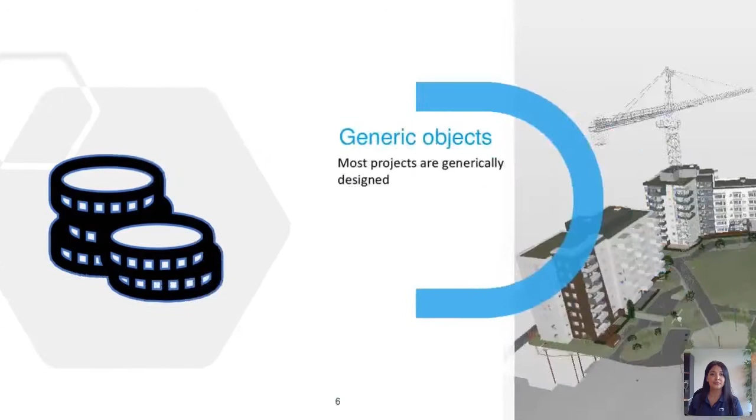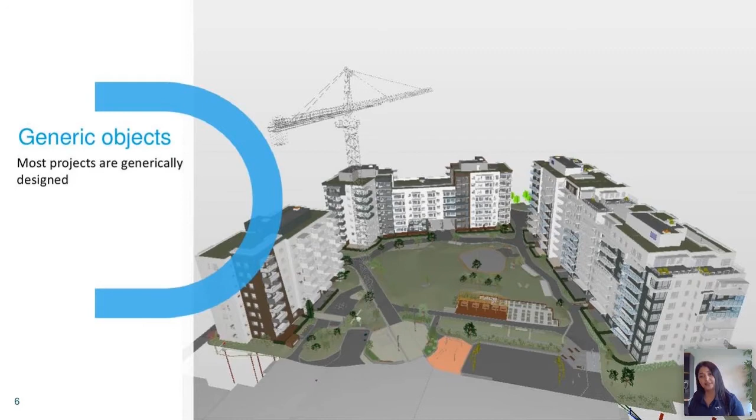First of all, I would like to start by saying most of the projects that are being used in BIM today, or being modeled today, are being modeled with generic objects. That means they are generic and not specified. They do not tell you any data, unfortunately. This results in projects that are missing information or have fragmented information, information that may be entered into the project manager via an email, a USB stick, or PDFs.

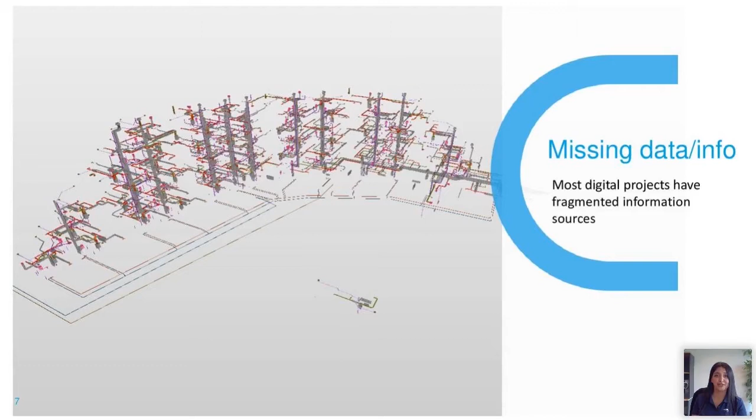Now, where is the mechanical data then? It's definitely not in the model, not yet. Unfortunately, 30% of materials that should be used in different projects, such as civil and infrastructure, are not being used, and unfortunately they end up being wasted. Now, why is it so? Today we will go through those three journeys and try to make them clearer.

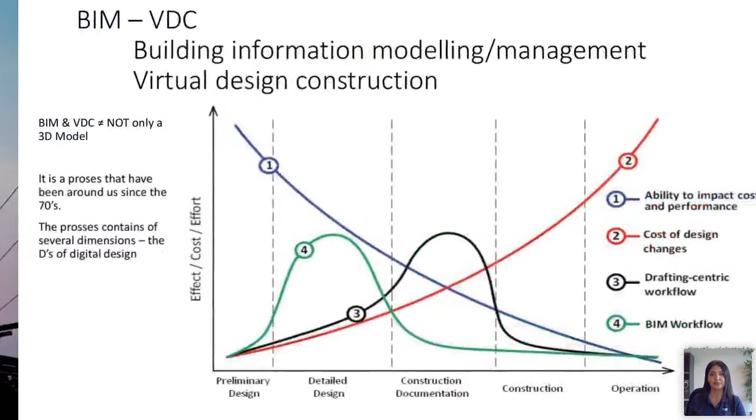On how to benefit by using manufacturer information or plugins. But before we go there, we need to start with why BIM and what is BIM? Is it only building information modeling, or is it a little bit more? Is it, for example, maybe management as well?

Can you use tools to be able to manage the whole procedure from A to Z during the whole project? Is BIM only for civils and only for buildings and houses, or could it be something that could be used in infrastructure?

In front of you, you will see four different graphs numbered 1, 2, 3, and 4, where 1 is the ability to have an impact and how this impact can change the performance of the project, where 2 represents the cost of the design and the cost of changes in the project, where 3 is the drafting workflow, the real 2D design we're used to, and how to have those on paper or in a model, when it comes to the workflow.

And number 4 represents the BIM workflow, basically the management workflow. So if we look at the preliminary design, in the beginning phase of a project, whether it's civil, manufacture, or infrastructure, it doesn't really matter. Both need a preliminary design, a pre-project, as we call it.

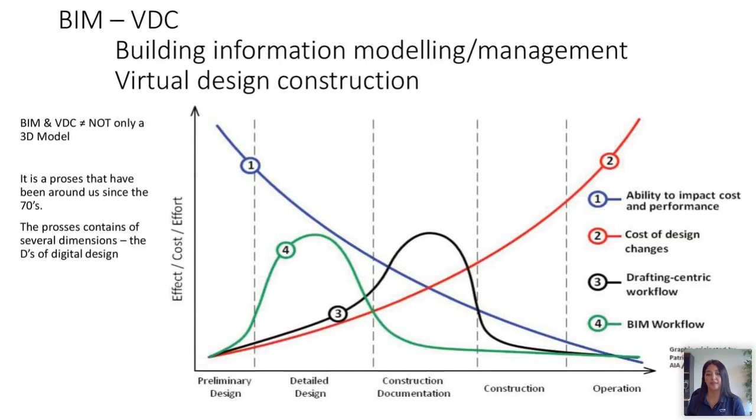So we also talk about different Ds in BIM and the different dimensions of BIM. Sometimes people say, oh no, BIM is something new. But BIM has been existing since the 60s and the 70s, like you saw in the previous slide. Meaning, what kind of information is already available.

So you have the contracts, you have some kind of sketch, or you have some kind of model that already exists. Well, that's BIM 1D and 2D. 2D, when is the 2D workflow that you guys have worked with previously.

3D is when you add a height, so it's no longer just an X and a Y axis. Now you have the Z axis.

That's the 3D model. Now, if you add another parameter called time, you'll get 4D. Now you can control the planning, you can control the resources, you can control when this product, those walls, those windows, those pipes, can come into the project or onto the site. So then you can control the ordering in 4D.

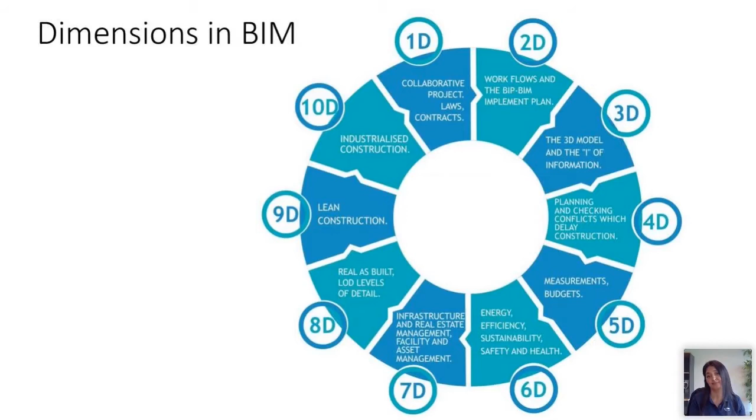A little bit about the programs that we are using today. So we're using different programs, and most likely, if you are a designer, you'll be working on either AutoCAD, Trimble, or different programs.

It's very important to remember that those programs are something called extrude programs. Basically, a line can be made into a pipe, or a line can be made into a wall. So it doesn't have that much information in the beginning, meaning the program itself might look like it has some architecture features, some structural features, but in reality this information is something you need to insert into the object yourself, or you use objects provided by the manufacturer.

Now, if you are working on Autodesk, either AutoCAD or Civil 3D, you'll generate either a DWG or a DXF. If you're working on Revit, you'll generate an RVT file. And the way all of those different programs are linked to each other is by having an IFC, the International Open BIM format, that can actually show you a presentation of the model and what data is in there. Does the building, do the walls collide with the windows or not, etc. All of that information could be controlled in an IFC model. But the value of the IFC increases with the data. Otherwise, it's just geometry, lacking data.

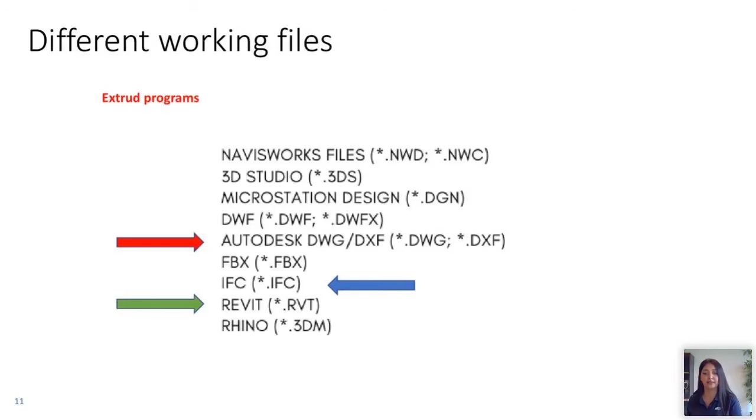This takes us further to something called level of development, or level of information, or model maturity index. I think the most confusing thing in BIM in general is that you have 3 different names that represent one thing only, which in this case is just the information — how much information do you have inside your objects. And it's not like all architects need to start from a detailed design drawing, which most naturally wouldn't happen.

Meaning you cannot be engineering and designing the real project in detail and still stay in LOD 100. It doesn't work like that, because LOD 100 will not give you the right information. Then you need to move from LOD 100 over to at least LOD 350.

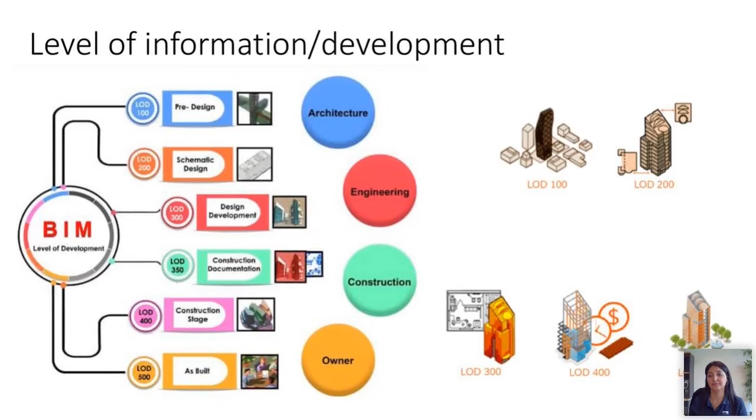So like we talked about earlier, BIM has been around for generations. It's nothing new. But in the 20th century, you had probably used most likely a LOD 100, where you even had to move from pressing a mouse to pressing a keyboard in order to put in and plug in some information.

But we're not there today. Today you could have a Zaha Hadid design that has so much information and knowledge without it being too heavy or without it being wrong.

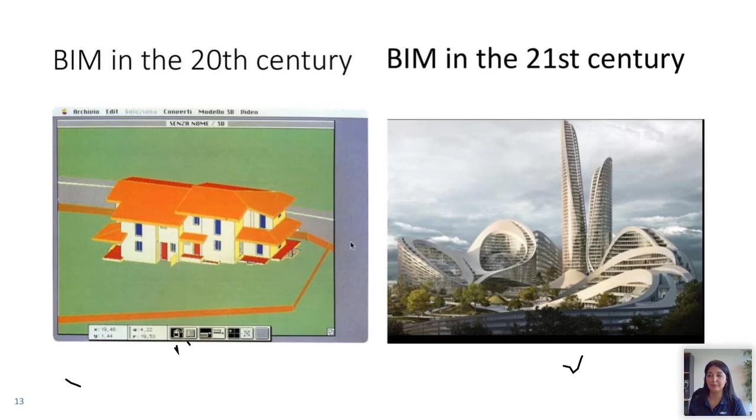Basically, from the building alliances in Norway, a third party, government regulations say the higher up you move in that triangle, the better it is for the economy of the project and future projects.

So if you could actually reduce your material usage, that's the whole point. Because then you're really only using what you need - you follow some kind of description, this is what I need to be able to do this project, I don't need anything more. Then all the returns, all the waste, everything will be minimized.

And how do we get here? Because this must be the ideal place to be for everyone. If you're a building owner, an engineer, or an architect, this area should be where we all want to be.

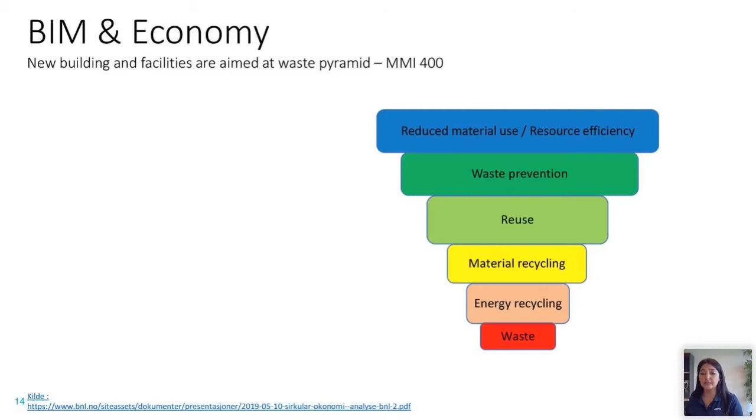And all of us in the different positions in this sector have a different responsibility to be able to get there. I'm not going to go through all those points, but I've tried to describe it in a way where the different responsibilities and who they lie with are shown by colors.

This makes sense because it's the owners who are going to be sitting with the model or with the building for at least 70, 90, 100 years into the future.

But who is supplying this information or this product are the contractors or the manufacturers, which is a list that comes towards the end. So I've tried to show you guys a little bit about how

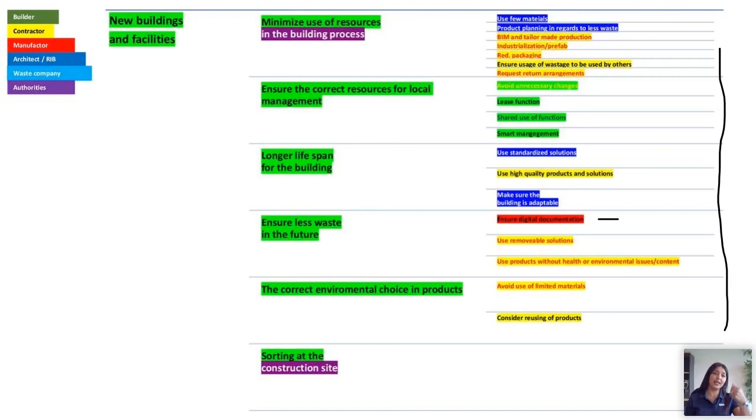You could read it in a mechanical way. You don't need another human being to go in, open up a PDF, look at it, read from it, and then extract the information. That's a waste of time.

What we need is enough data for you, so you could order based on that, for example. But then we need to know what kind of data you need.

I hope this was a little bit explaining of how we could help you with, for example, removable solutions, using products without any problems with health, and also not least the environment conditions - that it's not too much noise, or the water runs in the pipe correctly, etc.

All of this is something that we could help the contractor with. But again, you need to talk to us about it.

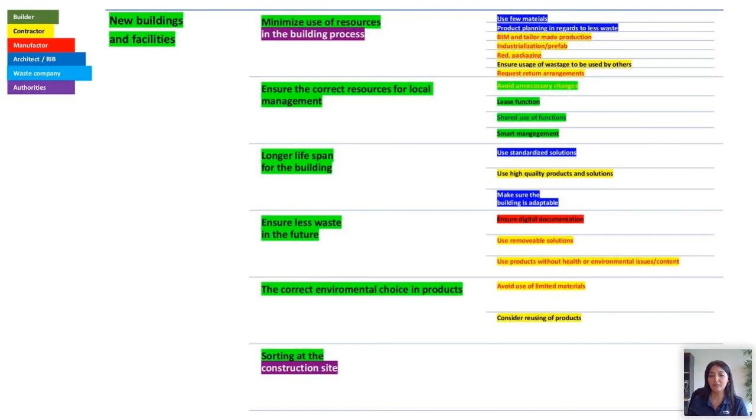So a little bit about Wavin, and in the next chapter, how our design could be done easily.

So what we have available today across the 4 countries: we have SiTech Plus available, we have AS Plus available, we have Wafix, which is very familiar in Norway. We have Pexrør or Tigris in Denmark, which is also well known. We have the Q-Bic Plus or infiltration cassettes, and we have the new PPR, or Ekoplastik as we call it, also available on MagiCAD in Finland.

We also have the tanks, the oil separator tanks as well.

I know that some of you guys have probably already gone in on MagiCAD and downloaded some of our availabilities there.

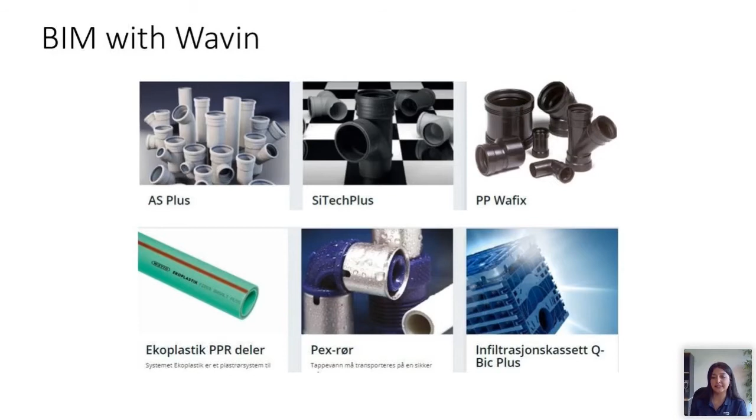So this is how they would look like in the project that you guys would download. It will be represented with an OD and a DN, depending on how you guys are designing, either based on inner diameter or outer diameter - so you have Wafix PP, AS, and SiTech.

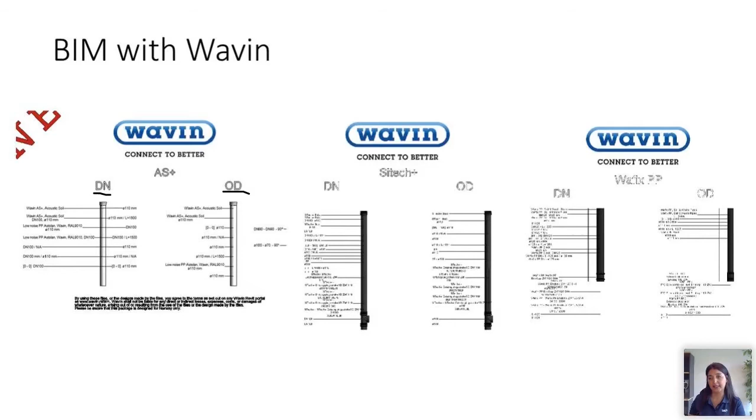And there you go with the Ekoplastik PPR and the HEP2O. So what's going to happen is we will probably be having a future webinar on what you guys would like to know about, or have a real step-by-step walkthrough on how to use our packages in a real project.

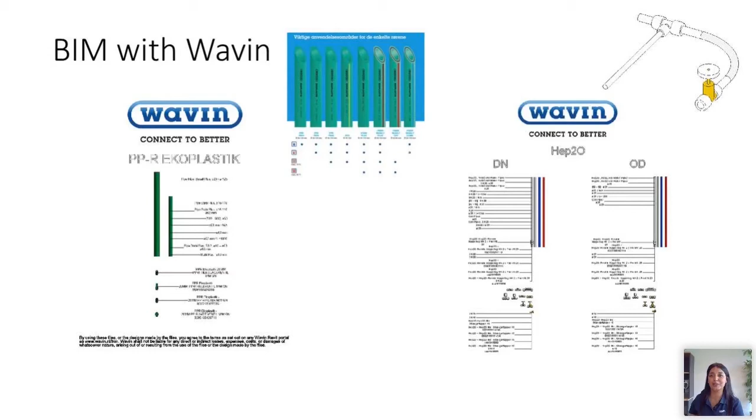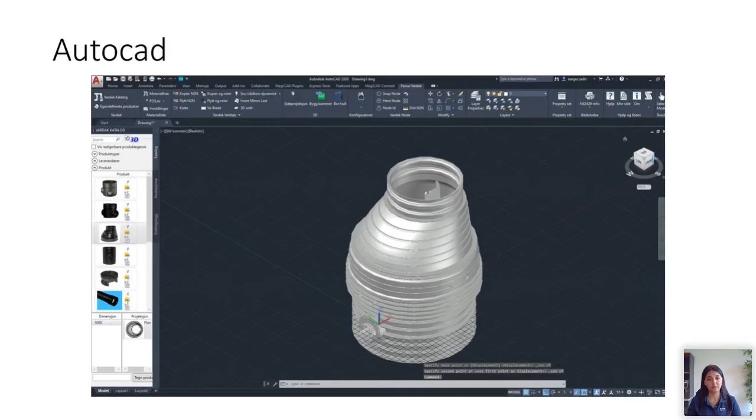And in Novapoint, if you guys use that kind of library, no problem as well - you could find our products there too, and you can use them when it comes to Civil 3D.

You can use them by laying, and you can also use Dynamo in Civil 3D, where you can place things - for example, if you have 10 kilometers and you know that every 50 or 70 meters, depending on the country's regulation, you need a manhole. By using Dynamo, which is now part of Civil 3D as of this year, you can place a manhole every 70 meters, for example, and it will happen automatically like this.

So you don't need to actually go in and manually put this in every time. If it's of any interest, we could absolutely have a webinar about this and talk a little bit about the possibilities we could have together by using a library combined with Dynamo.

So all of our data is scripted, and all of our information is scripted in the packages. The data that you need will be either inside the package or linked on top of it.

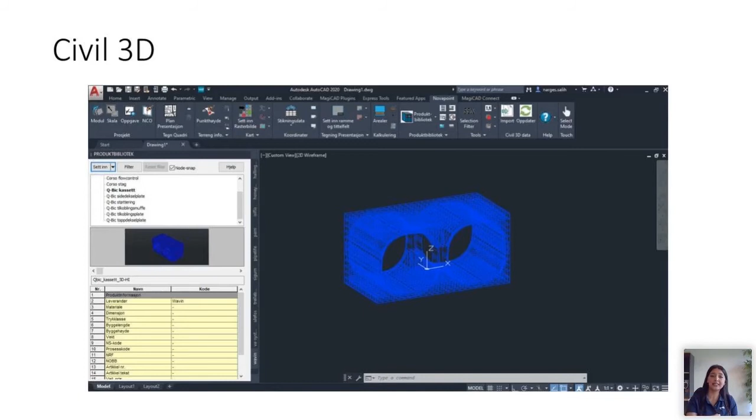So I'm going to show you guys a little bit of a video.

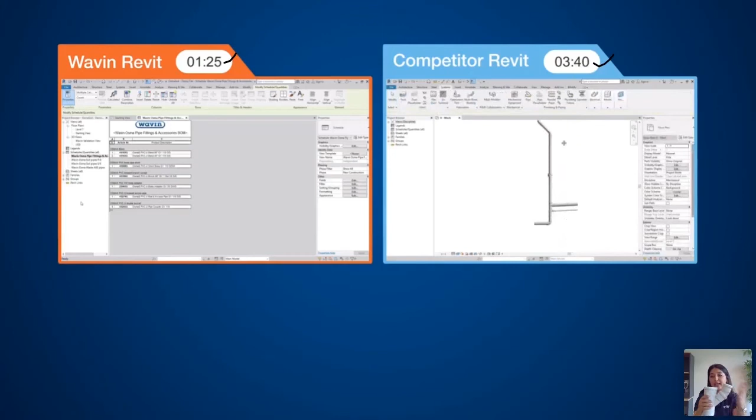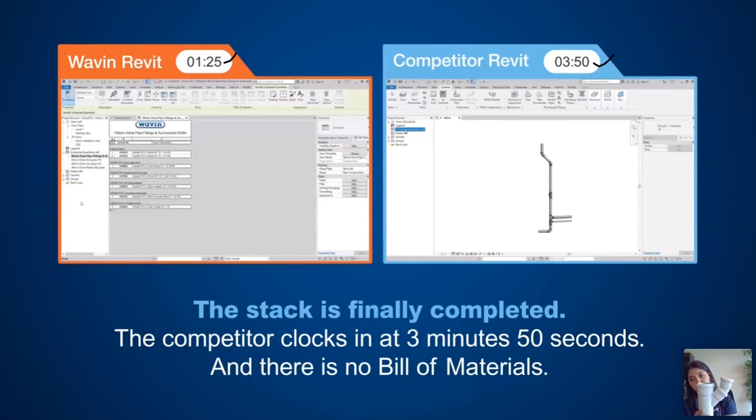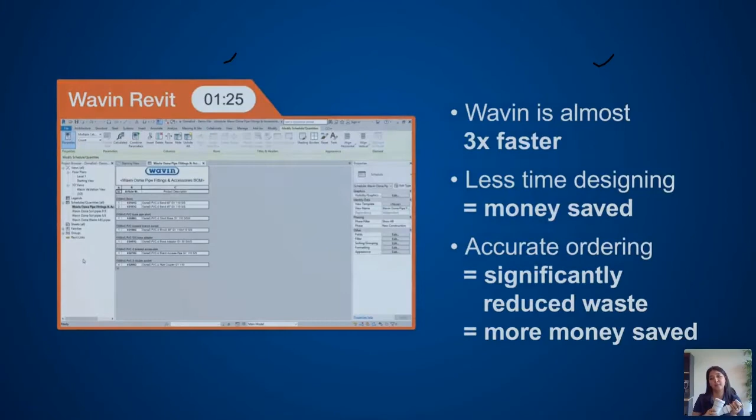So again, this is the example of why you cannot design a 52-degree bend, because it doesn't exist. That's how simple it is. It does not exist. We have a standard, all the manufacturers have a standard of what you can order, and it needs to be either 45, 30, 60, etc. All this list of different fittings that we have.

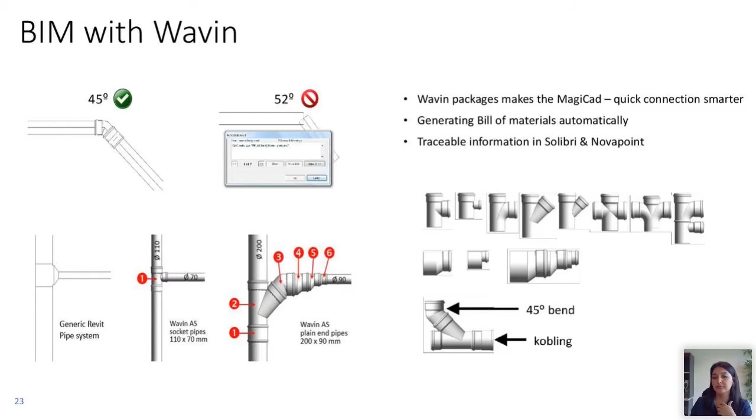So those are the problem solvers that we have. What is the difference between the Wavin packages and a generic package? I'm just going to run quickly through that. When it's a generic pipe solution, you can design with what you want. So in this case, this bend right here, angle 52, no one can deliver that, unfortunately.

LOD 100, meaning that there's absolutely no information in the pipes that you are designing, and there's no way you can trace it back when you are in an IFC model.

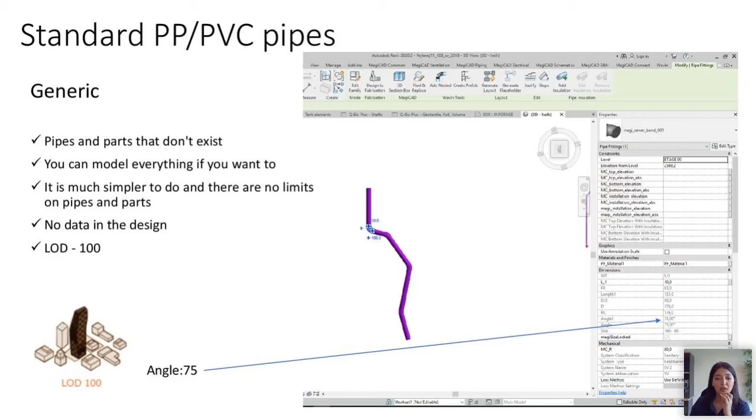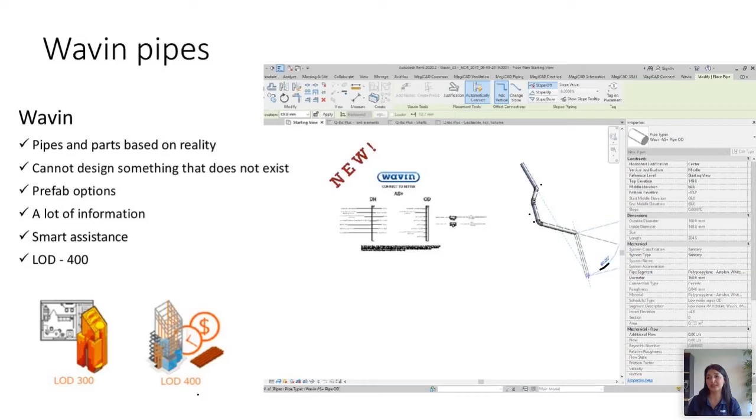While when you design with the manufacturing packages, especially Wavin, we have some kind of smart assistants that are only allowing you to actually be able to design what's available, like mentioned earlier. So as maybe it's not so clear to see it here, but I'm trying to make a 60-degree bend down there. So then it's allowing you and saying, yeah, it's fine. And all those bends are something that you could actually in real life find, meaning that it's LOD 400, which is one step closer to 5D and the costs.

I'm just gonna skip those two. So we have also made this called Wavin ribbon, which will be available for you if you just send me an email or if you just contact me, and it's absolutely something that we could make available for you as a designer, where you can choose something called vendor neutral.

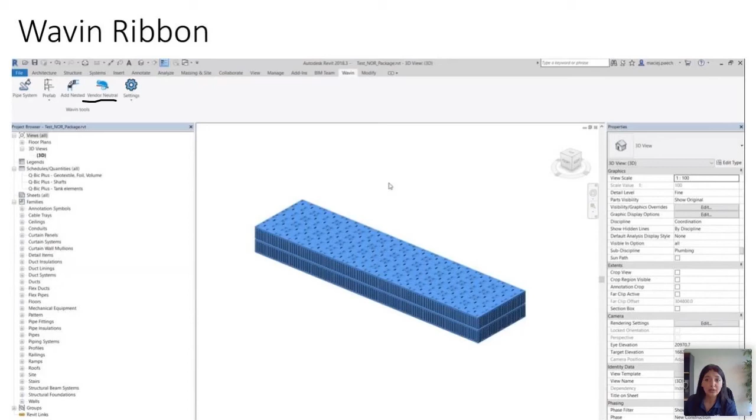So you can strip the knowledge of the pipe, leaving the data there, but you do not need to use the manufacturer name, which is still traceable in the detailed project, when they need to use this information of actually who is the manufacturer, and then you can turn it on. So it's like a turn on and turn off button. But again, you need to be in the Wavin ribbon, which is, of course, free. So everything that we're talking about today is free available.

So I'm just going to go through the different projects that we have been working on from Norway and a few from Denmark. In this case, I'm going to pick the projects in Norway, where the customer needed a full overview, because in this project, they were controlled on the amount of waste and what they do with the waste on the project, on the site. So they needed to know exactly the amount of pipes and the fittings and everything. So the customer asked us if we could redesign the whole project for them. And yes, of course, we did that, again, free of charge.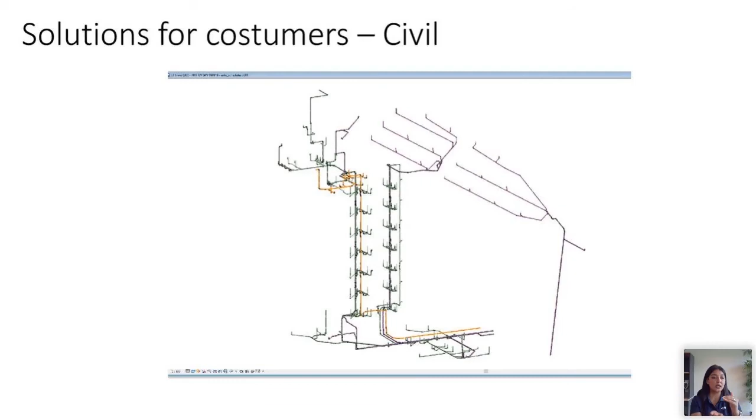And they wanted all the information based on floors, because again, they were controlled - they couldn't order everything at one point. They were controlled on how much waste they were creating every day. So they got a list automatically. When we finished the design, they got this list of exactly the amount of meters and how many fittings they need per floor, and where the cuttings are, etc.

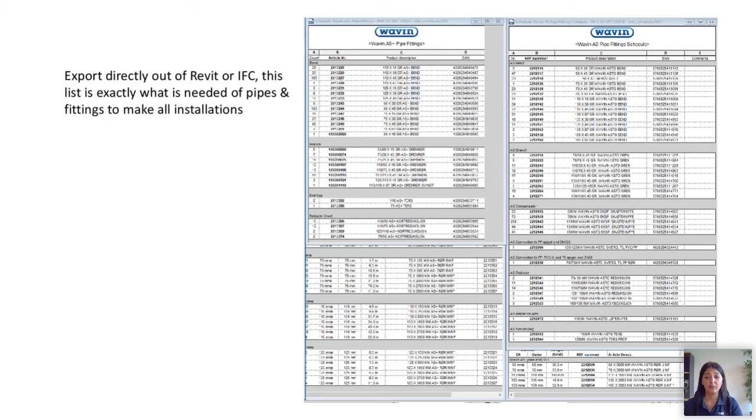So what they found out straight away is, for example, for roof water they needed a certain amount of fittings, for fat they needed those fittings, and for soil and water they needed those fittings. So it says 'etasje 6', but in English it means floor 6, and the pipes.

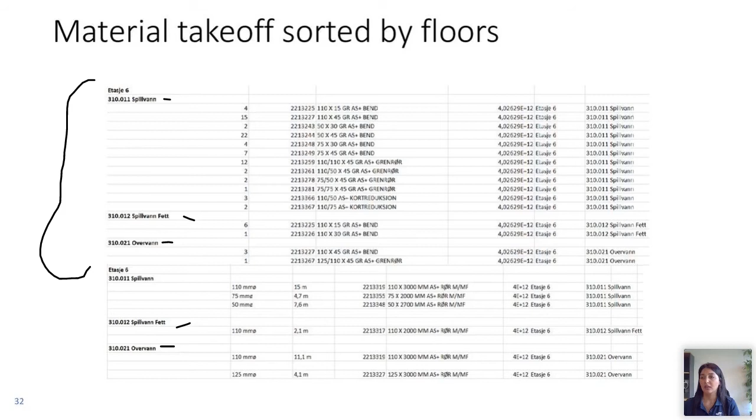What happened straight away is the customer and the engineers found out that those, well they called them 'buslomme' in Scandinavian, or stoppers, water acceleration stoppers, were happening every 10th floor. They still wanted to use AS plus, but they straight away saw that this will affect the waste, and affect what length you need to cut in, and all those issues or struggles that came with it.

So what they asked about straight away is, could you please prefabricate this? What we did, we made this whole section, and it was very simple because it was already designed. You knew you needed 4 fittings, and some kind of pipes in the middle. We designed 5 different solutions, and then the customer together with the engineer chose this solution.

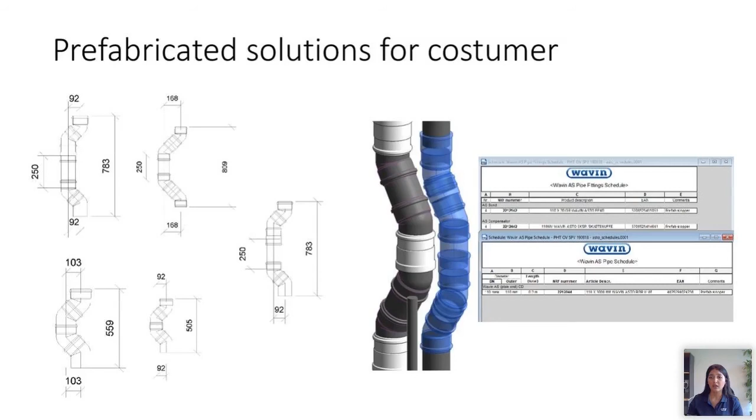So this solution was prefabricated. What they found out straight away was they saved around 67 hours in total by having the whole bill of material, by having this area prefabricated. They saved a lot of time, and of course that means they saved costs as well, because when they were given this whole bill of material, they knew exactly what to order, and we had an agreement that if it was too much, we would take it back without any charges.

And this is BIM 5D and 6D combined, because now you're really controlling the savings. If you have 7,000 euros on this project, it's not that much. On this project, I think it was around 1,000 or 1,500 meter pipes. So imagine if you have a road that's around 10 kilometers, how much savings would it be then if you knew exactly what you needed?

So back to having solutions prefabricated - it could not be done if it was not BIM tailored.

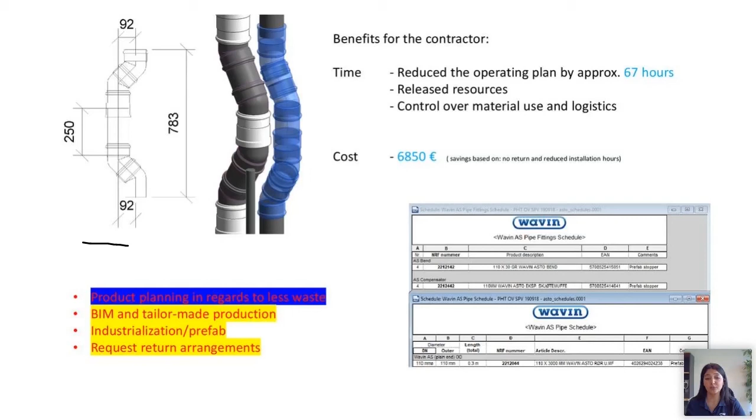Another project example here, especially during these weird times we have at the moment with corona, as you guys know. Wavin is a very big company with different production sites in different places in the world, and it's not natural that we deliver everything from home in Norway or Denmark. We would most likely buy it from other Wavin manufacturing areas. In this case it was SiTech, which is produced and manufactured in Italy at the moment.

And what happened was, when Italy was supposed to be on lockdown, we all got very, very honestly, very afraid and worried. What's going to happen to all our SiTech projects? How are we going to be able to deliver those projects? Luckily for us, our site or plant in Italy was not locked down, which was very good.

But again, we knew exactly what they needed in this project to be able to deliver everything at the right time, so the production never stopped for our customers. This is how you could really maintain a full production site, so the project could be delivered at the right time, and hopefully everyone at work was healthy. But at least the project didn't stop because of lack of material, because they already had it there. This would not have been possible if you were working on an LOD 100, or when you're not choosing the right manufacturer.

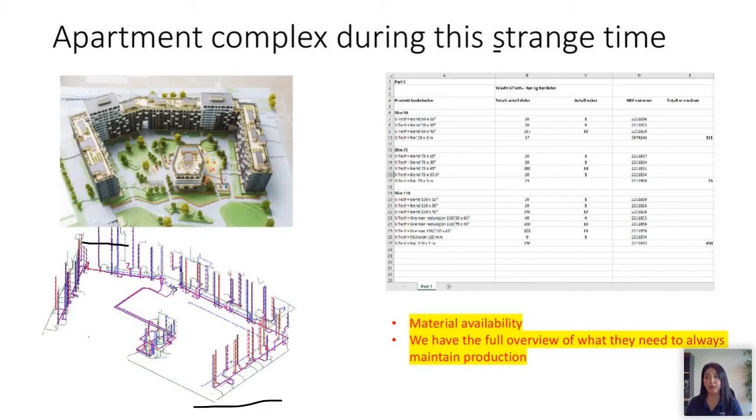Another example - I have a lot of examples, so it would be hard to go through all of them in only 45 minutes. Another example: a project manager told us that by having just the standard pipes and information at a level of information 100, he is spending around 6 hours just explaining why the design is different from the model and reality, and why on earth doesn't this work. Because suddenly you have the sprinklers, you have other pipes or other objects that are there acting as a hinder, or you're not able to actually connect the solutions.

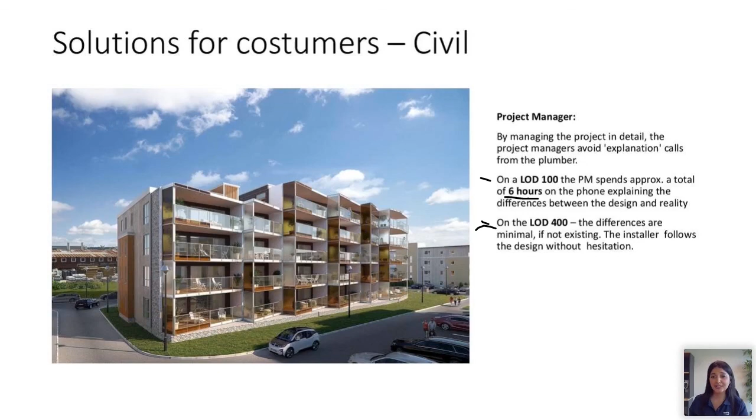While when he started using our LOD 400, no problem. It was down to the millimeter, so it was easier for the installer to see and always be at the right place, to see where the connection is and how to connect it together. Again, 6 hours for a project manager controlling the resources - that's a lot.

This is what you could be getting from an engineer or from a consultant company. It doesn't matter if you are an owner or an installer, or if you're a main contractor, or a subcontractor. This is the level of detail it should be on - both the combination of geometry and the data.

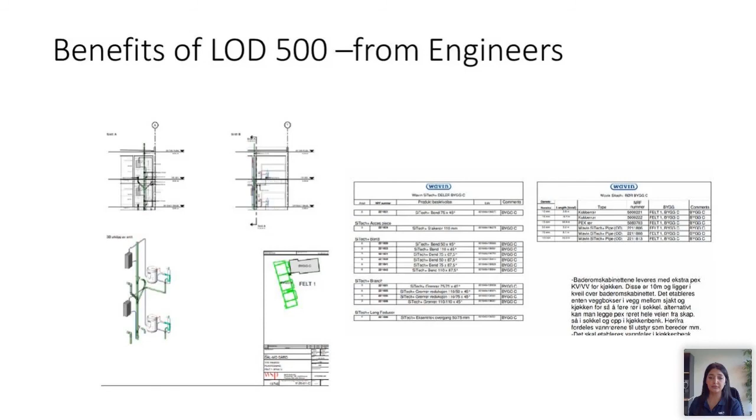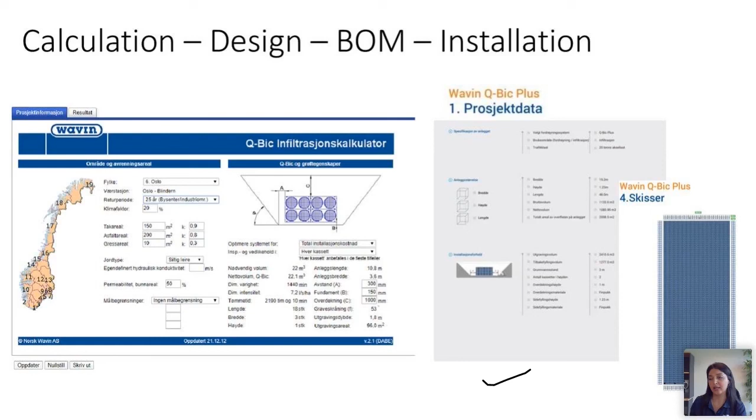And here we have another solution for the infrastructure, a Q-Bic Plus. This calculation is available free of charge on our web pages. We created a schematic, just an example, and the customer was happy with it. We designed it for them, saving 0 hours spent on design.

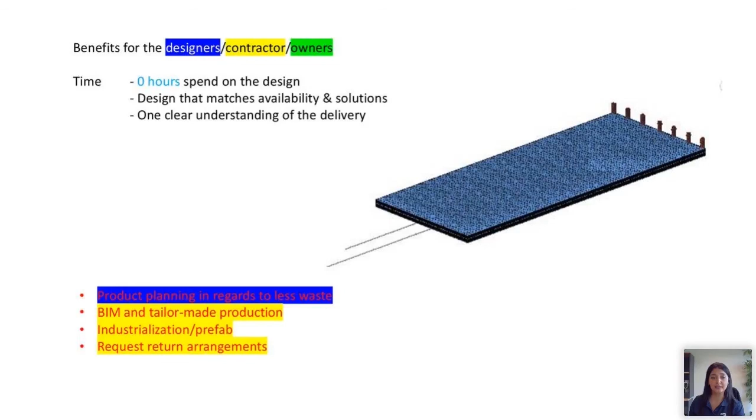Tailored BIM again when it comes to below ground gave a fuller IFC model, and then you could easily take information takeoff from the IFC model.

Another example is where we have this prefabricated. So prefabrication and designing with bends or manholes in infrastructure is not a problem, but it becomes a problem when the customers, whether the wholesaler or the end customer, have to order it and need it the day after, because we don't have time to deliver on short notice. If the designer gives us this detailed design a few months or a few weeks before the project, then it would be ready and not delayed. And of course it's traceable, and the traceable data is there.

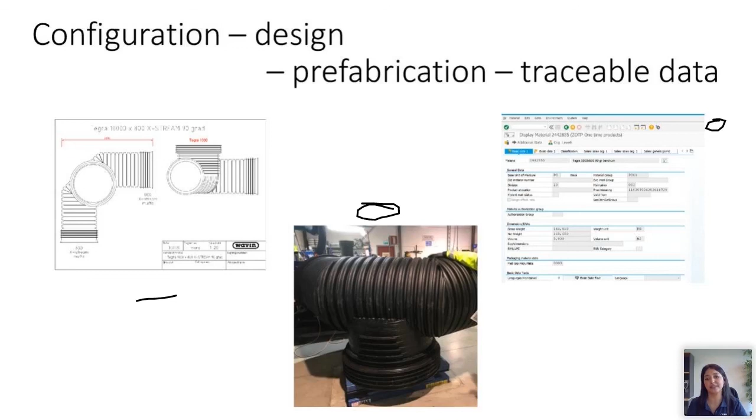As a summary, if you guys want tailored production and to maximize your BIM project, you need to be on a much higher level of information, and you need to move towards LOD, the level of detail 400, in order to really maximize the benefits of BIM. Otherwise it will not be easy.

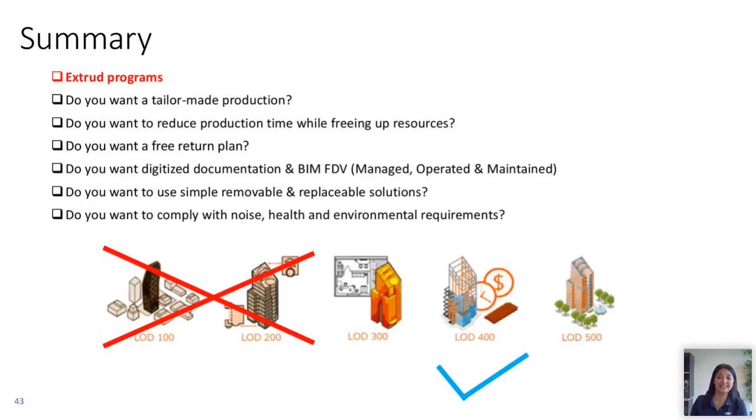Now we have some frequently asked questions. Is our packages compatible with IFC? The answer, yes, of course, no problem, because IFC is an export that you do already from Revit or from Civil 3D, so it's not a problem, and the information is traceable. You only need to have what we call a material takeoff list, maybe property sets. Most of you guys, if you work in Civil 3D, you know what I'm talking about. So you include it into the model and take it out into the IFC.

No problem. Another question is, why does the model differ, the geometry in the IFC model versus reality? I hope during this whole session we've managed to explain this question. The answer is because you are on LOD 100. It's not because of anything else. If you had information and knowledge before in the design, there will never be a difference between the IFC model and the reality.